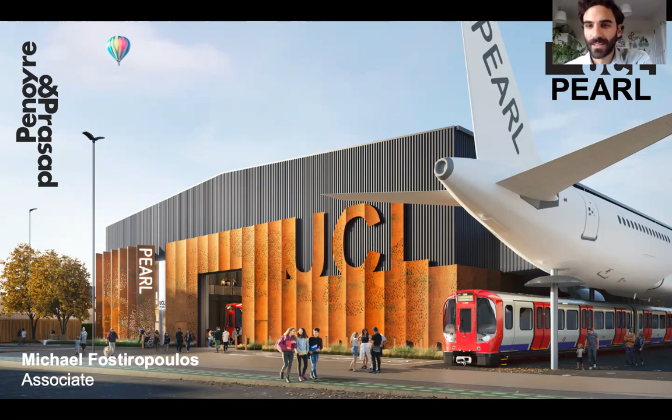Thanks very much. And I'm really excited to talk to you all about this project. It's definitely been a unique one. I'm not sure we'll ever get to design another building with a decommissioned aeroplane hanging off the side of it. So there's a lot to get through in 8 or 9 minutes, so I'll try to whiz through as quickly as I possibly can. So we'll go to the next slide, please.

So the brief we were presented with by Professor Nick Tyler, who's the mastermind behind the project at UCL, was that he needed a building to house the world. So quite a thrilling challenge for us as architects, as you can imagine. Professor Nick and his team, if we go to the next slide, are currently based at Pamela in North London, where they research pretty much any way you can imagine that people might interact with the built environment.

From prototyping new tube carriage designs for TfL, how a large crowd of people might escape from an emergency situation or terror threat, right down to the scale of the neurons in our brains, how somebody suffering from dementia might navigate a complex series of corridors, or how different lighting and smells might impact on the day-to-day life of somebody with autism, say. What lies behind all of this is really the pursuit of understanding how people perceive and interact with their environments, in order that we ultimately as designers might be able to create healthier and better places to live.

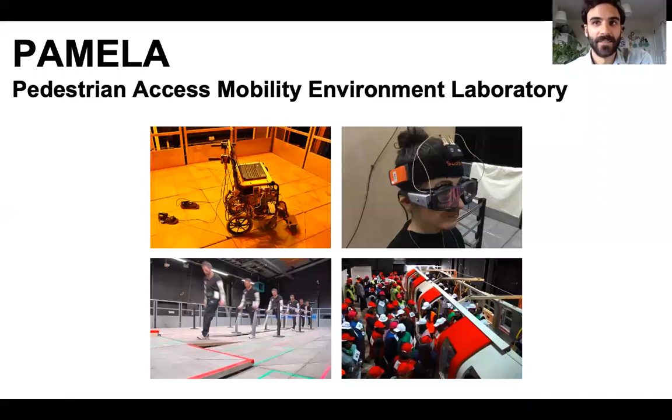So Pearl is a supersized version of the previous facility. It's multi-scalar, it's hyper-flexible, it's transdisciplinary, it's permeable, and it's community-focused. And as UCL's Dean of Engineering puts it, it's a once in a generation opportunity for UCL to lead on a global stage.

So to give a bit of wider context, Pearl is part of an innovative approach to national infrastructure research known as UKCRIC, which is really the driver for around £600 billion worth of investment in our national infrastructure over the next 50 years. UKCRIC is a collaborative network of labs across 15 universities, although Pearl is the only one really that actually puts people at the centre of its approach. The whole idea at Pearl is to look at research in a completely different way.

And in 1934, the May and Baker pharmaceutical site was established up the road from the Ford factory. During the post-war recovery period, May and Baker played a really important role in meeting the enormous demand for medicines around the world. And so maybe we can draw some sort of a parallel here with the work, say, AstraZeneca are doing now with Oxford on the COVID vaccine.

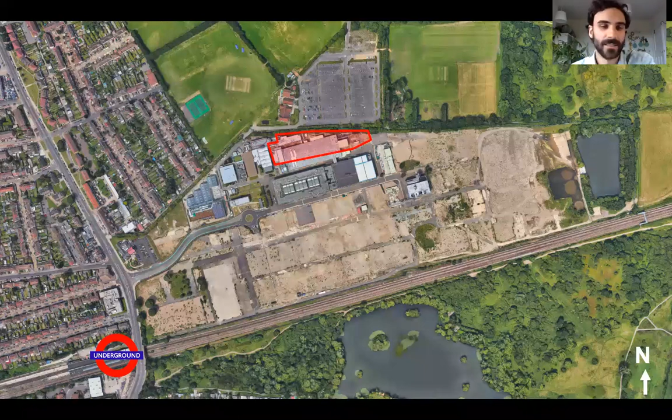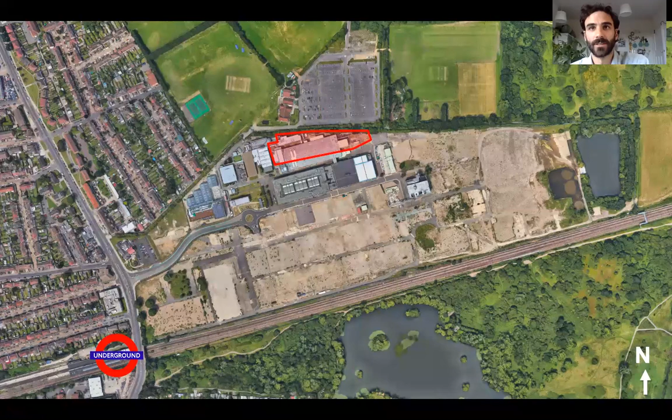Fast forward to 2020 and May and Baker are long gone, and what's left is a vast industrial wasteland. The London Borough of Barking and Dagenham are obviously desperate to turn this site into a force for good, so they were thrilled when the opportunity arose for UCL to purchase this piece of land here. And this is the council's vision for the future. And with UCL here in the form of Pearl, this coming together of science, technology, research, and the creative industries will be huge for the borough.

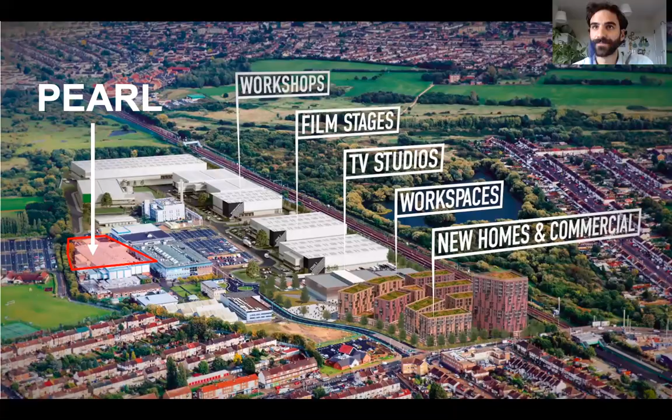So here's Pearl's piece of land there. The buildings on it that you can see there were the most recent additions to the pharmaceutical plant, but for the past few years have actually only been used for filming Avengers movies, believe it or not.

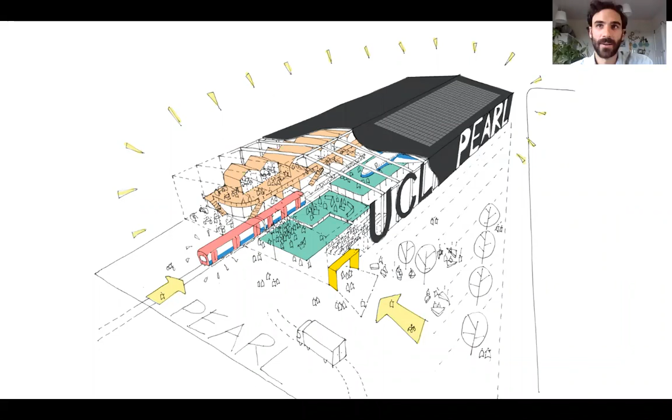And the next slide shows just an early sketch that we did right at the beginning, really, to think about how Pearl might come together on this site. And basically, it's a big box of tricks. The Groove, aptly named by Professor Nick, who's a jazz musician when he's not rethinking the whole world, is a two-story building within a building, and it's the brain box of the laboratory, as well as the public entrance and the interface with the community.

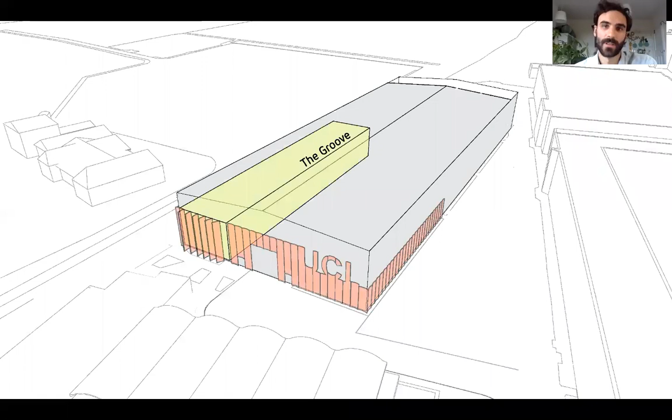And to let everyone know that UCL's landed in Dagenham, we've dressed the front of the building, and plant is plugged in at the far end of the building to really simplify the services strategy. And the rest of the space is the lab itself, with a zone of large flexible storage to one side.

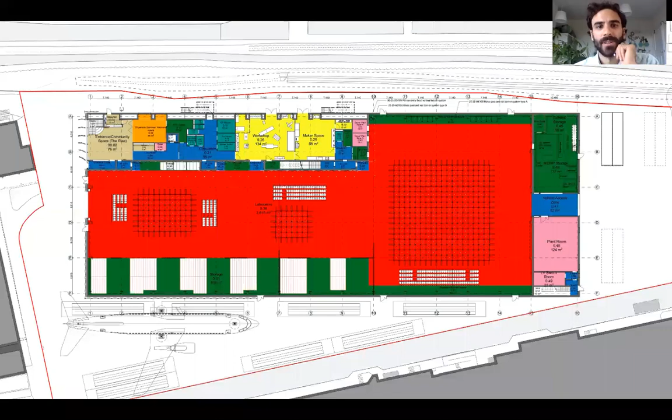So the next slide shows a floor plan, and here you can see how those elements are distributed across the space, with the main entrance in the top left corner and the 100-meter long lab shown in red. And the square grids you can see in the lab are reconfigurable hydraulic flooring units that can be infinitely rearranged, not just shown in these three grids there, and controlled via an iPad.

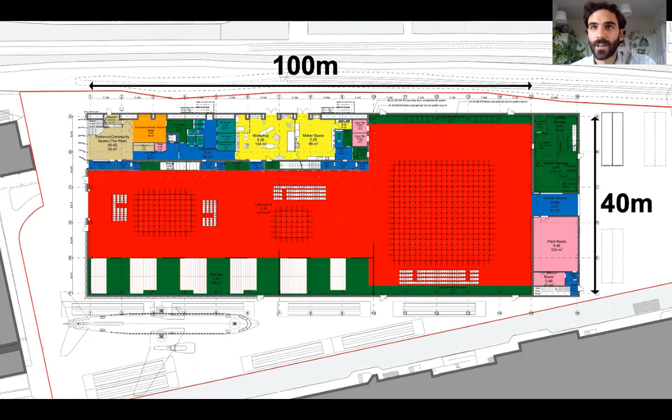And on the next slide, we come inside the lab space, and you can see some of those flooring units being used to create various experiments and mobile seating for up to 600 members of the public. And there's a huge smart lighting and speaker array above that can help recreate almost any internal or external condition you can imagine. In many ways, this is a lot like a giant black box theatre, except here you're trying to convince the active participants of the experiments, rather than the watching audience as you would in a theatre, that what they are touching or standing on is real.

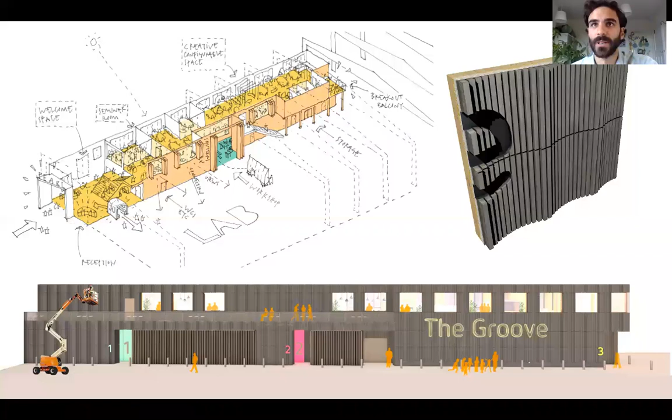So yeah, and there at the back right of the space, you can see the Groove, which if we go to the next slide, you can see is clad in black timber to ensure it doesn't disturb the experiments too much. And underneath that black timber cladding is a factory-made cross-laminated timber box that's completely structurally independent from the main steel frame, so it could be rapidly assembled on site in just a few days.

So here, these overviews inside the Groove, the two-story building, show super flexible workspace for the researchers that will be reconfigured on a kind of weekly basis, really, to meet the needs of the research projects. And they're overlooking the lab space below. And you can also see on the ground floor workshops for constructing sets and prototypes for experiments, and seminar rooms and community space and entrance on the left.

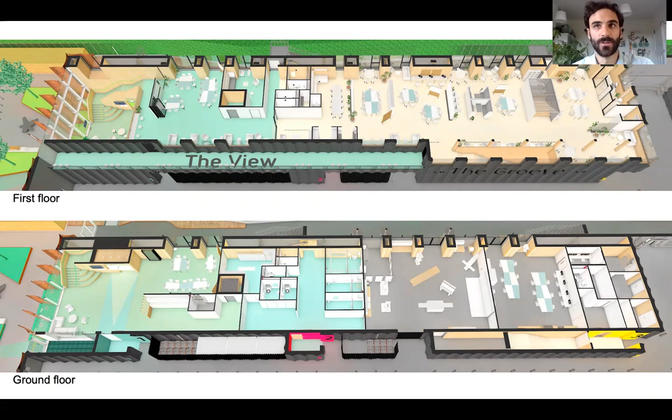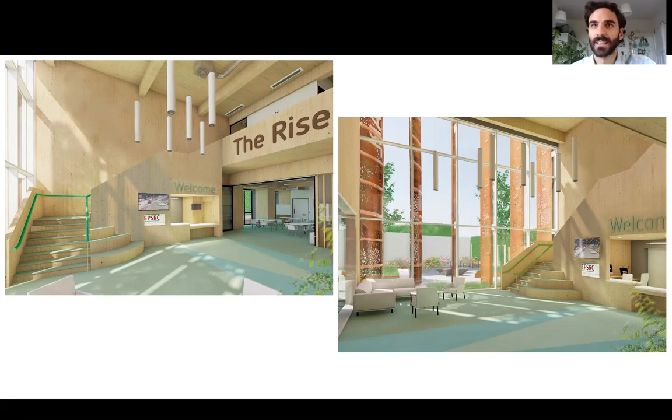And this is a couple of views of that community arrival space, where locals will be encouraged actively to drop in and have a chat with the team at Pearl, maybe about that dodgy crossing on the high street that just doesn't work for their wheelchair.

And on the roof, by taking up every single square inch of space with PV panels, as well as optimizing the building envelope and structure, we've managed to achieve UCL's first ever net zero carbon building, demonstrating the university's real commitment to addressing the climate emergency and leadership in the higher education sector.

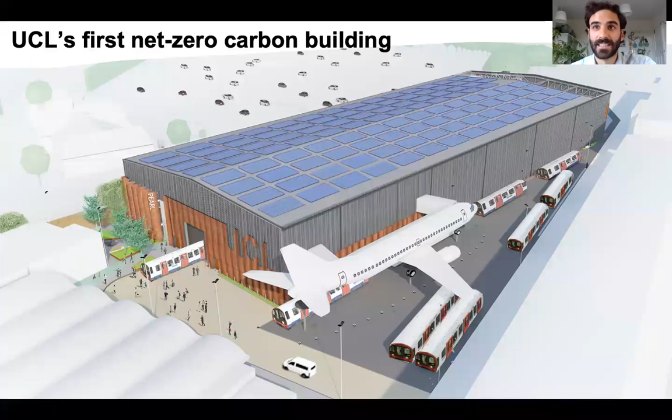So when designing Pearl's main entrance and architectural facade, we wanted to reference the wavy roof as a nod to the site's heritage. So hence the gentle scalloping of these 9-meter high industrial weathered steel panels that peel away from the glazed main entrance area to provide solar shading and signal arrival.

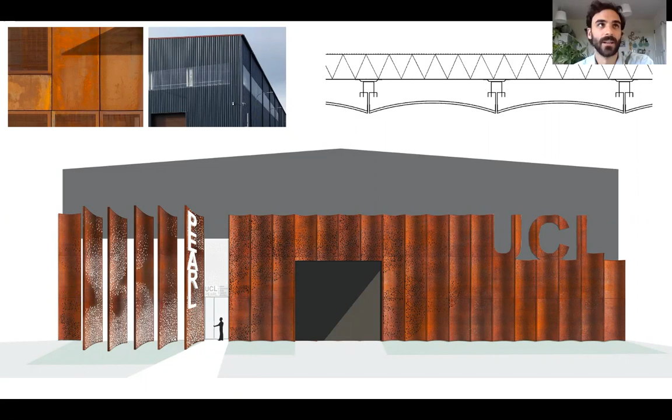And we perforated these panels to get light into the entrance space and to bring a sense of movement to the facade. And through lots of testing with Professor Nick and his team, we moved away from any regular patterns like some of the ones at the top there, which could be a cause of distressing visual noise for people with sensory or neurological difficulties.

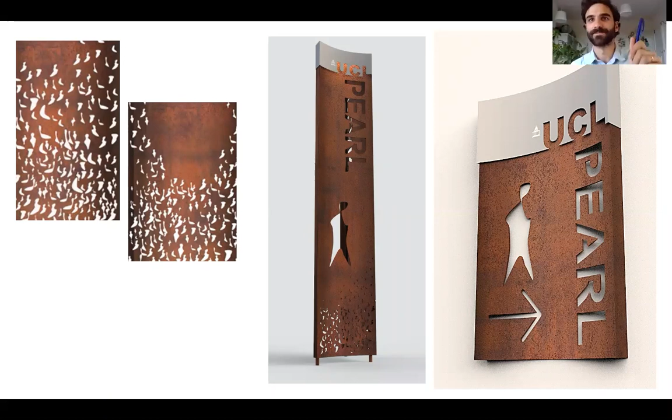So we instead looked at natural imagery, bird murmurations and people flow and crowd movement, which the last two there are big parts of the work that goes on at Pearl. And so zooming in, these perforations are made up of sort of anthropomorphic blobs to represent people, which are then carried through onto the signage across the site and the building. And the overall effect layers materiality and graphics and building identity that begin to tell Pearl's story.

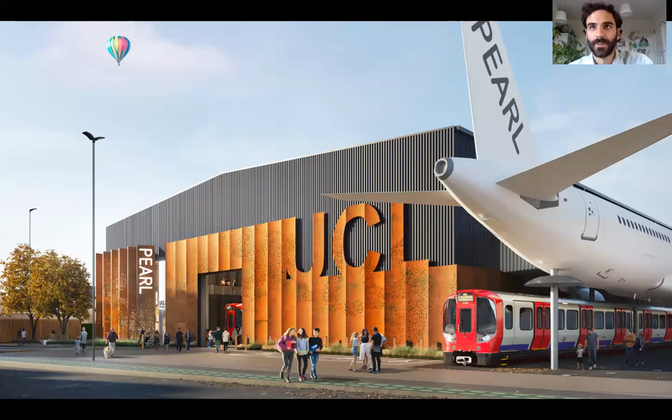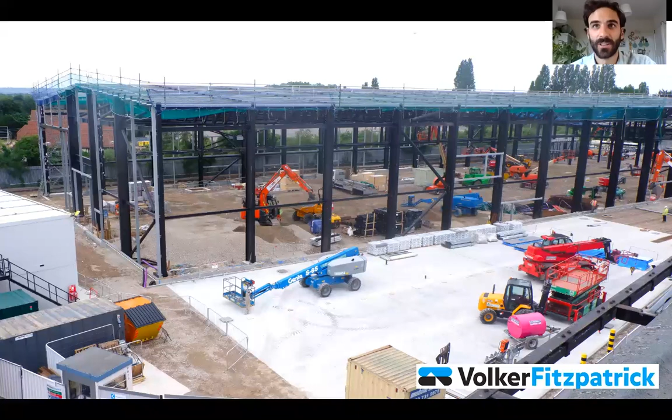And the building is a giant, finely tuned piece of research equipment, both inside and out, and is there really to serve and collaborate with its community from the local right up to the international. And yes, at some point, 2 Chinook helicopters are going to lower that plane into place. And touch wood, so far with no disruption on site during lockdown, we're on track to complete in spring 21.

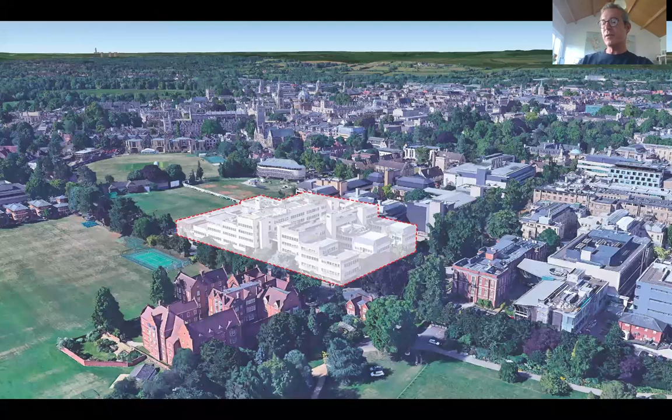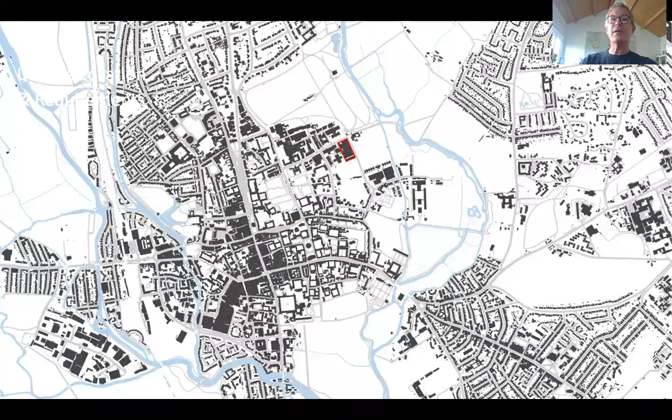So this building is now currently being demolished, but a plan is being developed and has been for some time in how to replace the departments who were occupying it. Next slide. And just in terms of location, for those of you who know Oxford, sorry if we just go back one, the building itself sits at the northeast side of the city and is a bookend really to the science quarter, which is also now falling into a conservation area. And the scale of this building as it stands currently, the Leslie Martin building, is one of the bigger university buildings within the Oxford campus.

So what is the building about? It's about bringing together 3 departments, experimental psychology, zoology and plant sciences, and bringing those 3 together into a new, really quite transformational experience for research, teaching and learning. And of the 3, the 2 departments with closest synergies really are zoology and plant sciences. And in the new facility, once it's ready, they will merge into one department to be known as biology. But in addition to that, the building is also about giving back to the public and engaging in a wider way, and we'll see how that happens a bit further down the line.

We've had to do a lot of engagement with the university. Obviously, bringing 3 big departments together involves a huge number of stakeholders, and our team have been managing that with the university over the last year and a half, and it's involved a significant input just to help develop the brief, refine the approach, and really understand some of the requirements of those departments, and importantly, how they will interact in the new facility itself. And then the wider issues around how the estate itself wants to run the facility, how that engages with the community, and the number of the logistical issues in really bringing a new building of this scale on stream.

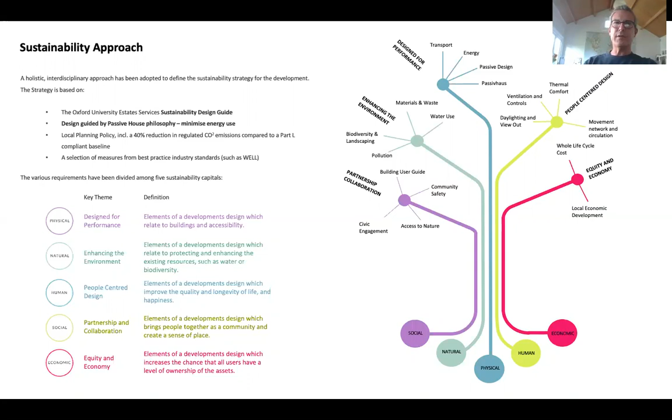And in addition to that, we've agreed an approach with the university to also look at a 40% carbon reduction over the Part L compliant baseline. But more than that, we were interested in trying to see how that sustainability approach really tapped into other features, especially the human and social aspects of sustainability, and how that can be driven into the building itself.

Next. A very quick look at the site itself. As I said, the current building occupies a corner site, which has a blind corner to it. And I think what we found was that there were a number of challenges around circulation, access, logistics, neighbours, views, and so forth. And we tried to digest that and then reinterpret it into a new facility.

And one of the important things that we've had to deal with is the retention of a very new building that was bolted onto the back of the old Tinbergen building that you can see at the bottom end of the site. It's called the Chemistry Teaching Laboratory, which is only a 2-year-old new facility. And that has had to be retained and will be adapted, modified, and kept in full operation throughout this new development.

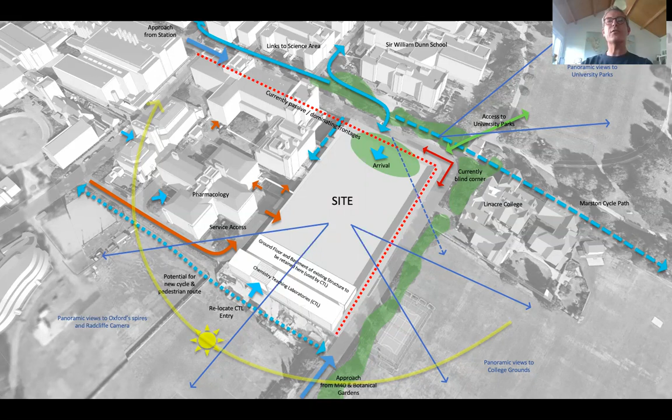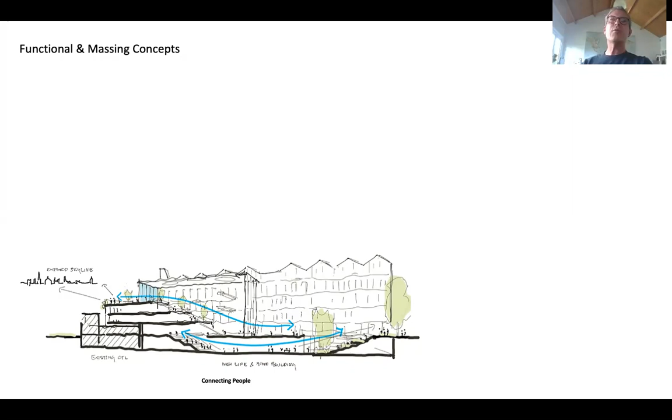So what are we doing in terms of a design response? We're connecting people. It's about bringing a new facility together. It involves postgraduate research, scientists, academics, as well as students. It's also about engaging the wider community. And one of the ideas was to give back some of the space on this site, whilst addressing some of the issues around public realm and accessibility.

It also needs to be a very adaptable building. Much of the research that goes on is grant funded, and those groups ebb and flow with the grants. So we've needed to really focus hard on how wet labs could become offices, and how we contain the right level of write-up space to service some of those laboratories. And furthermore, how in the long term, because this is a building for 50 years, how the science may change and adapt, and how that's tackled and accommodated within the structure itself.

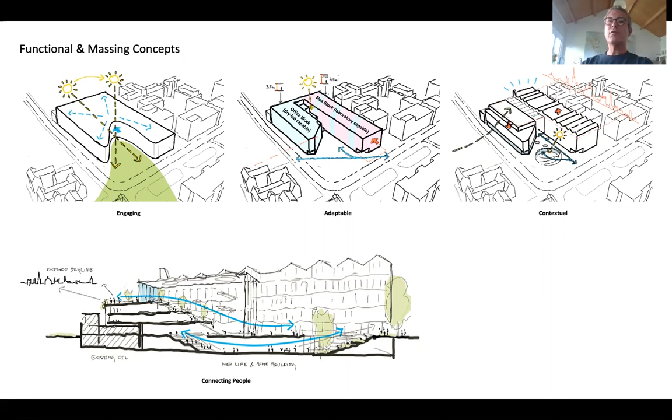And then contextually, this is a big new building in Oxford, and as you can imagine, especially within the conservation area, there are a huge number of contextual issues, certainly around massing, scale, skyline, impact on Oxford itself, long distance views. And then importantly, from a well-being perspective, how the building is connected to nature, given that it's on the edge of some playing fields and parkland, and how that is brought into the building to really help the well-being of its occupants in the long term.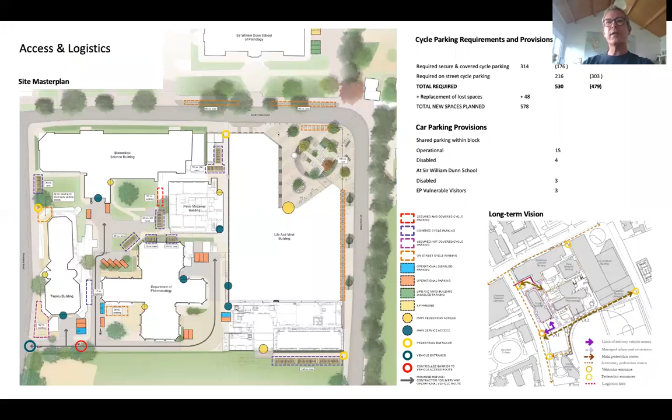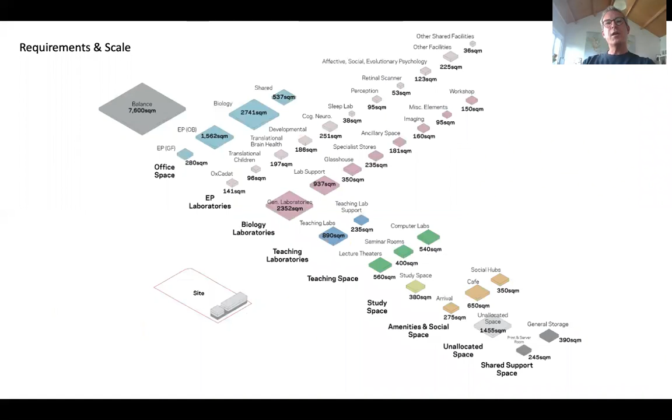Quickly, in terms of scale, this is a 25,000 square metre building, bigger than the existing Tinbergen building, but on a smaller footprint because of the way we've given some of that space back to the public realm. Principal contents are traditional teaching and lecture facilities. There are also a number of laboratories, both category 2 wet labs and dry labs for the experimental psychology department. And on the top of what we're calling the flex block, where the laboratories are embedded, there are also a number of glass houses and growth chambers.

So a very complex mix, and how do we bring that into a new building? We've taken the idea of having 2 principal blocks, the flex block containing laboratories, and the office block, which contains most of the write-up space. And these are brought together through a common atrium space.

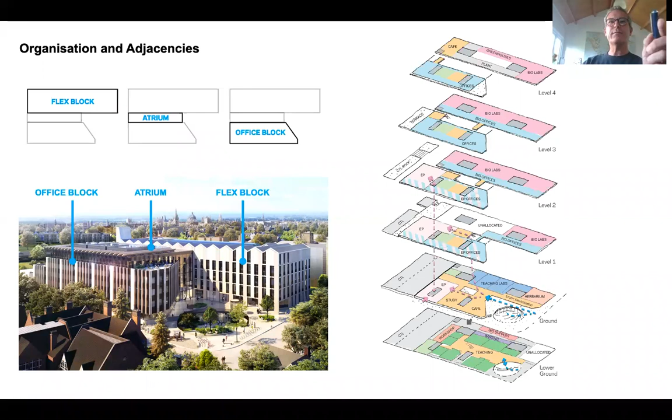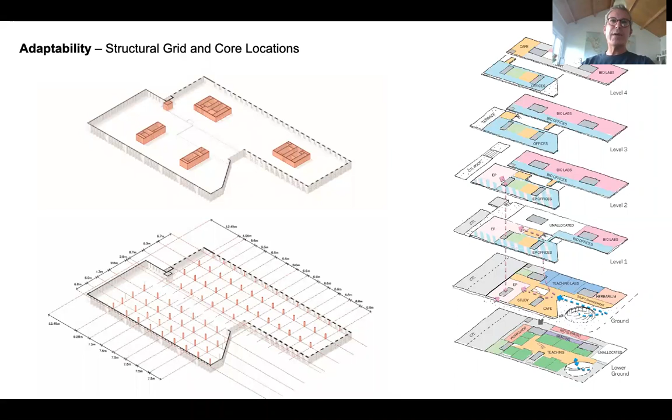One of the things that we've had to consider also is the long-term adaptability of the building, but also the buildability, trying to ensure that we can get this development up and running as soon as possible, given that two of the departments are currently in temporary accommodation. So looking at structural grids, planning grids, service risers and cores, and also vibrational analysis so that we can anticipate or best adapt the building in the long term to future needs of the science.

Coming back to that idea of a shared ecosystem and drawing upon the themes of the building in terms of its research, we've tried to embed some of those ideas in some of the common spaces within the facility, primarily from entrance point through up the building in the atrium and in the general meeting areas along the way, to give a shared experience, an opportunity to both meet, relax, work and engage, and really bring those three departments together in a facility that they haven't really experienced before.

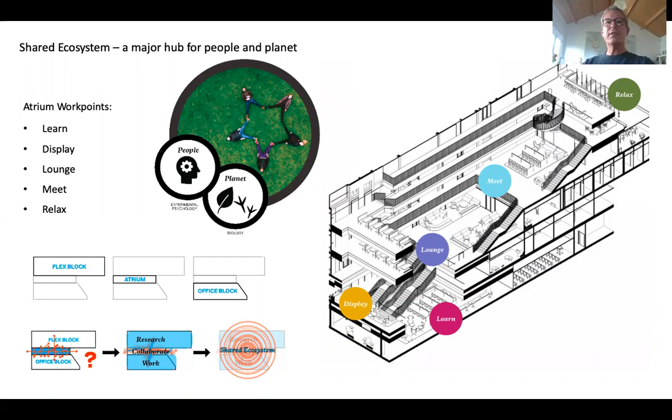So this is how it's shaping up. This is just giving a long section with elevation view into the building, and really also trying to explain how the majority of the teaching space, which is postgraduate students coming into the building, are occupying the lower levels of the facility. So we've developed an approach to bringing students in at lower ground from a common entrance externally, as well as then connecting them through to the rest of the building with atrium space, daylight flooding down the building, and also really trying to ensure that there is a rich feel to the lower areas of the building in terms of light and activity.

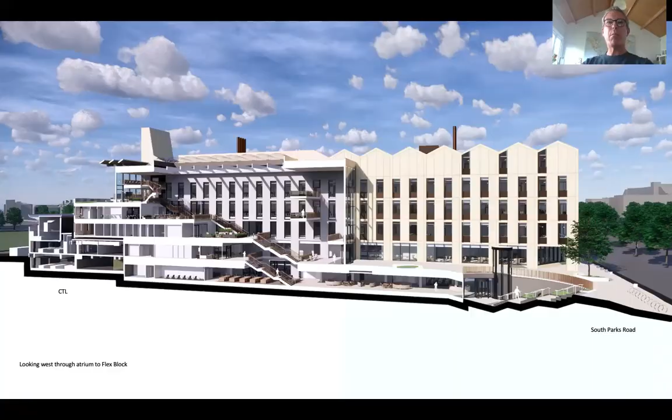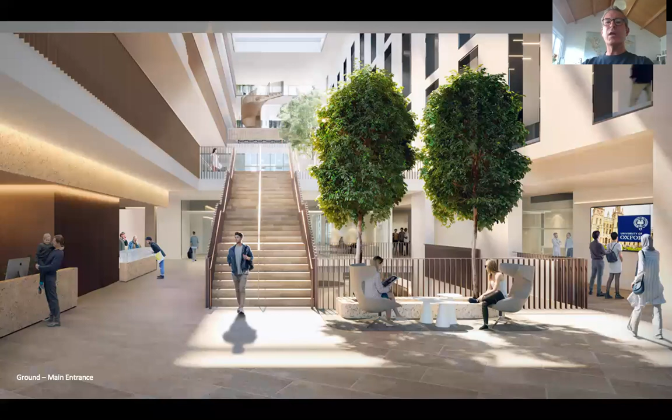Kind of just a working section at the moment across the building. This is a densely populated building as well, a maximum capacity of 2,000 people in here. So how do you deal with that in terms of daylight, well-being and so on? And one of the key themes here is that we ensure that the building is never one floor away from green space, whether you're at ground, lower ground or at the top floor. And these next images will just give you a feel for the quality of environment that we're trying to build into the facility as you experience the building from either a student or an academic's perspective.

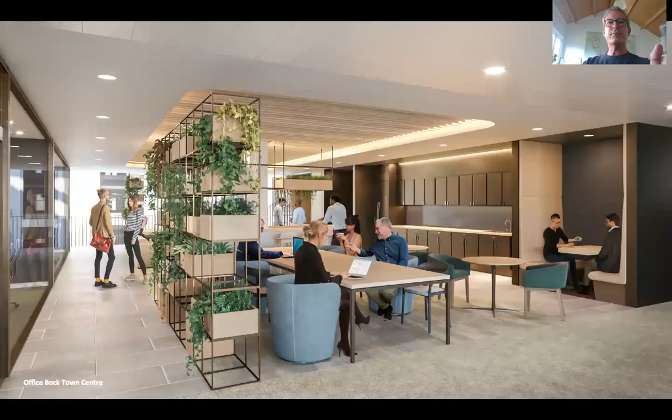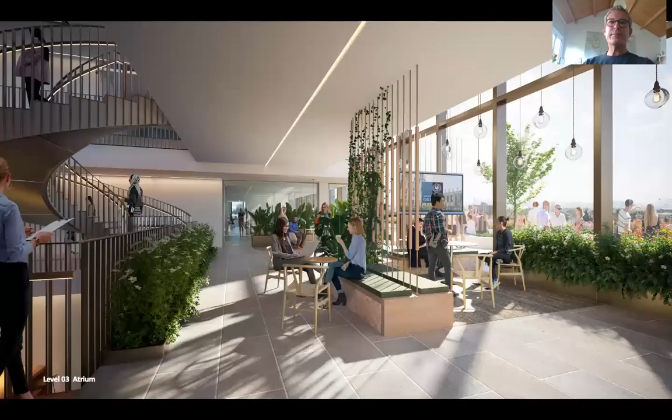Here, upper levels in the office block, it's important to be able to break out from conventional office space. We're developing spaces similar to this, which we've called a town centre, where people can congregate, gather, meet informally and work at the same time. And as we progress up the building, next slide, there are opportunities that we've incorporated to build in terraces along the way.

Sorry, just one back. And what we've tried to experience with the best use of the facility is making use of the fantastic views as you gain almost a unique perspective from the upper levels of the building, looking back to the city centre of Oxford and its beautiful skyline. Here there's an opportunity for cafe and functional space, and a really great place to celebrate the occupants' activities, whether it's for students, researchers, or indeed third parties. Next slide.

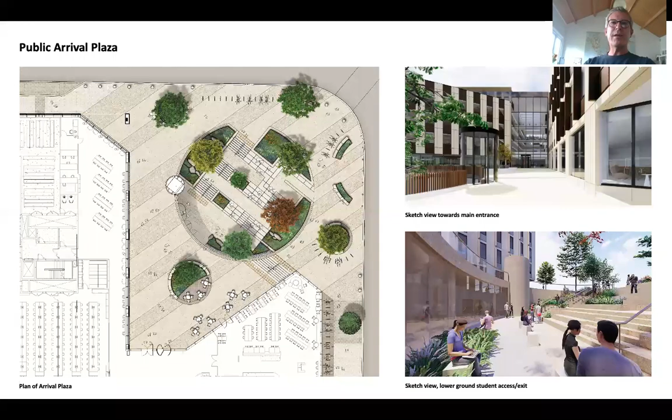Very quickly, coming back to the outside and how one approaches the building, I mentioned this external space. We're calling it a public plaza, and it's a clever device both to activate this corner of the site, to engage the public in good weather, but also draw people into the building, creating a really live and activated public area immediately outside the building itself. This also links the ground to lower ground entrance.

And one of the issues we've been challenged with is a VAT strategy around the building's funding. Given that teaching attracts VAT and research does not, we've grouped teaching, as I said, to the lower levels of the building. And that has really helped bring us a rigorous approach to where we put lecture spaces, seminar spaces and so forth, and really make best use of the budget we've got without incurring VAT penalties.

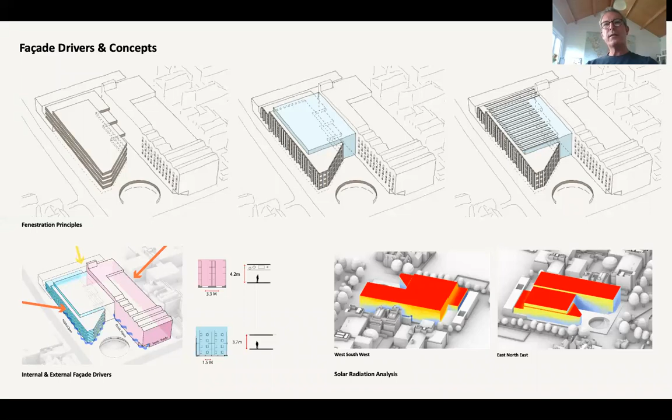Next slide. Very quickly, facade drivers, an external building envelope. Given its orientation and functionality, we've been doing lots of studies, including some computational analysis around how the facade is working. We've deployed a blue roof and also a huge amount of photovoltaics across the top of the office block. And next slide. And we're also looking at materiality as well. Much as the last speaker, we're talking to the Oxford City planners a lot about the contextuality and materiality of the building. How is that reflected in terms of a balanced budget and what we do with off-site fabrication?

In this case, we're currently looking at reconstituted stone panels and a layering system to also develop a very super insulated building envelope that achieves the passive house principles and guidelines that we've been tasked with tackling.

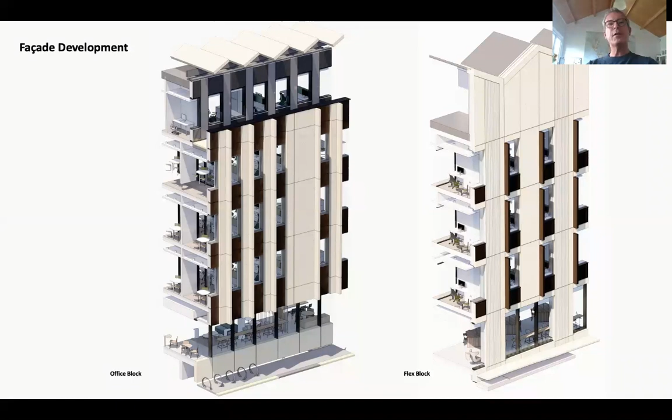Next slide. And similarly, one of the issues that we're trying to embed into the detailing of the facade is perhaps reflecting some of the studies that go on within the research. So we've looked also at some of the patterns and signals that come out of the science from the studies of animals, birds, plants, and humans, and whether that can be subtly reflected into the building facade itself. Next.

And just a couple of images to end on. This just gives you an overview of how the building is panning out. The design is well underway, and in a short while we'll be looking to make a full planning application. There's a lot more I could tell you about. We're very excited about this project. It will be the biggest academic building the university has commissioned in its history.

It has a prominent site and we have the privilege of really making something special on this site for the next 50 years. So we're delighted to be involved and look forward to updating you perhaps in a year's time or so as it progresses. Thank you.

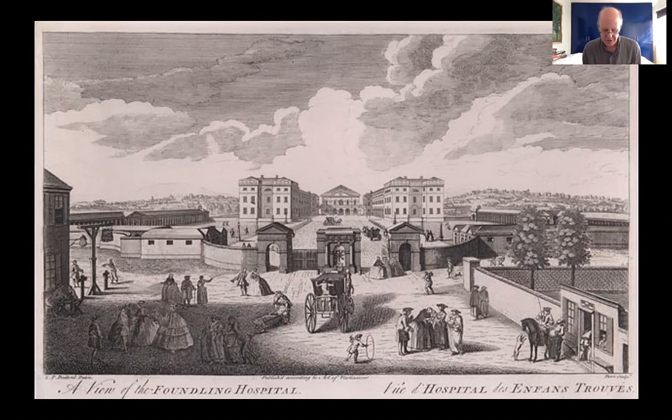Our actual site location is the wall on the bottom right of this image. And what we saw in this was an opportunity really to re-engage care and science with the public realm and the urban context, to celebrate the often invisible work of clinicians and scientists and re-engage that with urban culture. So, next slide.

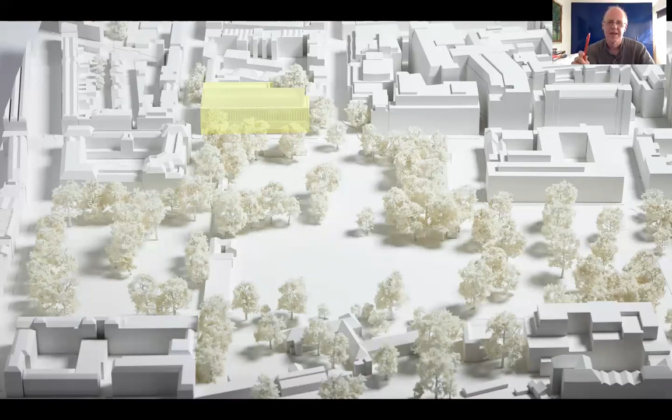This is Coram's Fields today. Our building is picked out in yellow. And it's got a very prominent, almost civic facade with views northwards over Coram's Fields. And then to the south, it steps down towards the more domestic scale of the Bloomsbury Conservation Area. Quite a challenging environment to create a major new building.

There's a double height laboratory at lower ground level, which engages with the street. Ground floor and first floor are largely outpatients facilities. Then above that, we have the research workspace, and at the top of the building, a GMP facility, which is Europe's largest clean room facility of its type, developing treatments at the genetic scale.

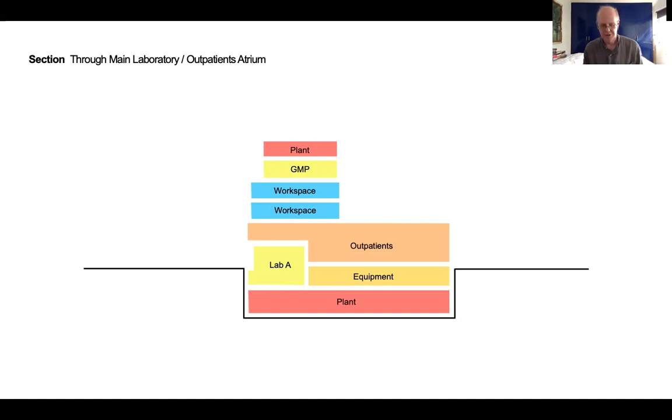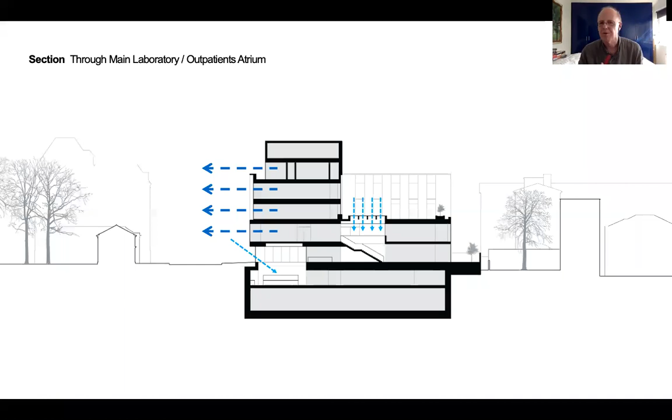So the experience of the building is very much around the interaction of these different activities, and also about the interaction with the external environment. That's views out and daylight in, which is fundamental for the well-being of staff and patients, but in particular the connection to public realm and that idea of being aware in the street of the activity and purpose of the building. So a central concept really is the visibility of activities from the street, which you see in this early section, looking down from the street into the double height laboratory and across to the outpatients department.

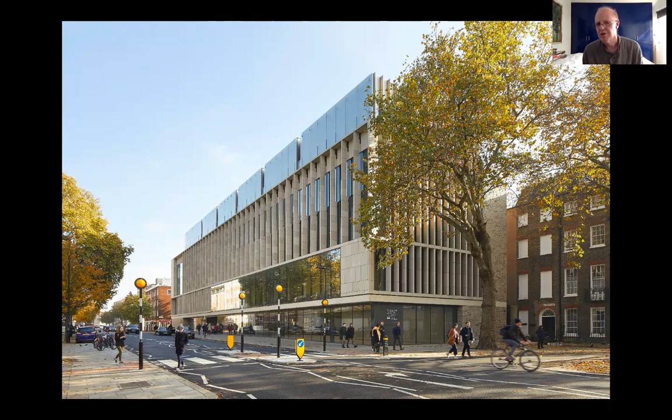So this is the facade that faces Coram's Fields. It's got a series of terracotta fins that give it this almost civic quality. But what they do is they screen certain activities, and then they allow engagement between other activities and the spaces outside, not only into the laboratory and outpatients entrance areas at ground floor, but also the large first floor waiting space for outpatients.

So you look in from the street directly into the laboratory, sometimes right the way through the building. And there's a remarkable sense of transparency. I think because it's north facing without the solar coatings you often get on the glass, you get these kind of views across the laboratory to the outpatients areas beyond.

And the facade itself, although it looks opaque, it looks quite solid, which makes it sit within the conservation area context of brick buildings. It's actually very glazed, almost like a loggia, and the building's experienced as a series of spatial layers moving backwards from the street.

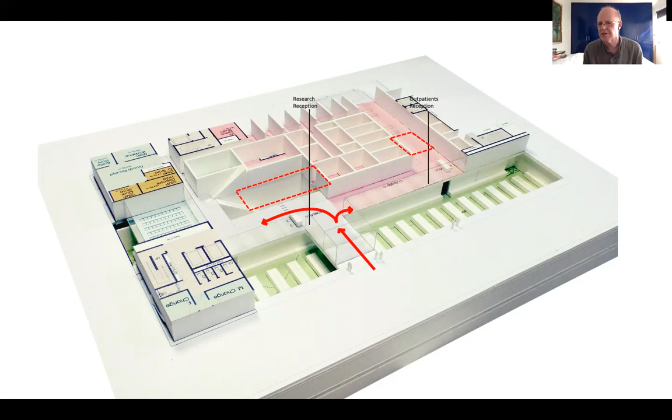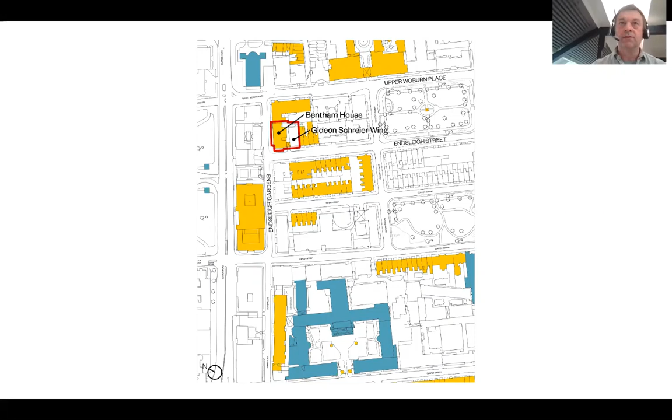Next slide, please. This is how we found it. This was the arrangement of the faculty between the two buildings. So on this stacked drawing on the left-hand side of the screen is Bentham House. Bentham House was in fact designed pre-war but built in the 50s as a trade union building.

UCL bought it in the 60s, and then, as I say, they bought Hillel House, which they renamed the Gideon Schreier wing on the right-hand side, and you can see just the one link at first floor going across there, and you can see the state of the teaching facilities as we found it that very much needed updating, and the issues relating to poor wayfinding and circulation.

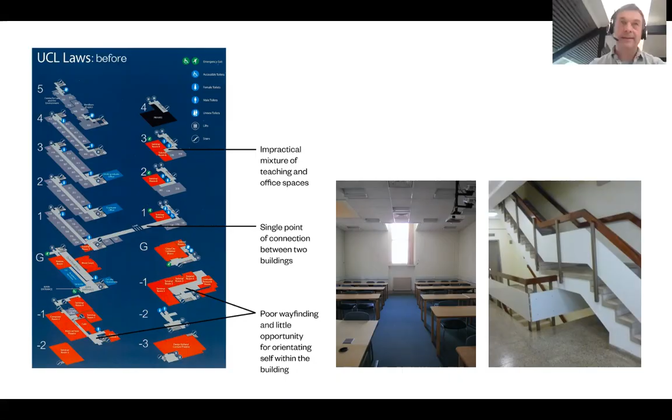Next slide, please. And this is the first floor plan. On the left side, the existing arrangement, you can see the single link through a very narrow corridor between the two buildings. So they operated more or less independently. And on the right, the moves we made, which I'll talk you through, to open up and improve that arrangement with a new extension on the back of the Hillel House building to the top of this drawing.

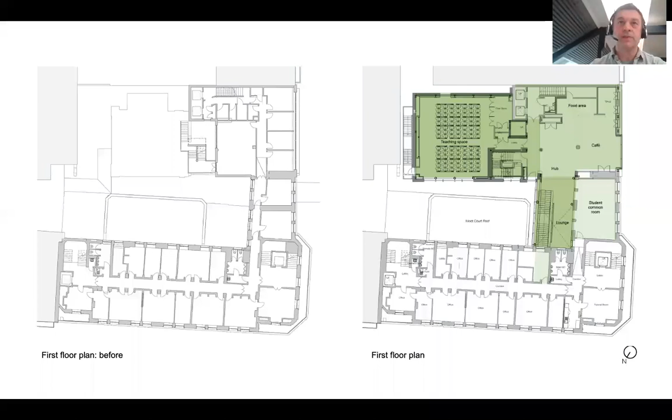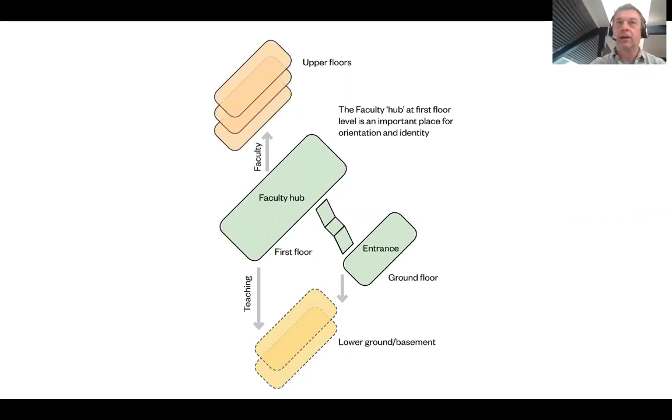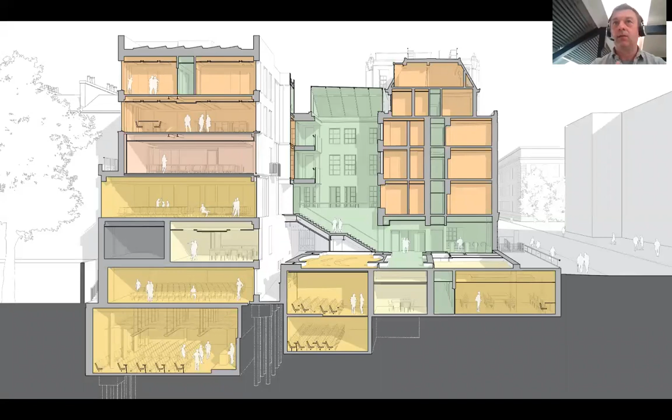The bottom two levels on the left-hand side were existing, and we extended up and out across there to provide more teaching facilities. And in the green in the middle of the plan is our intervention to link the two buildings through an atrium space, exposing what was the rear envelope of the original building as well.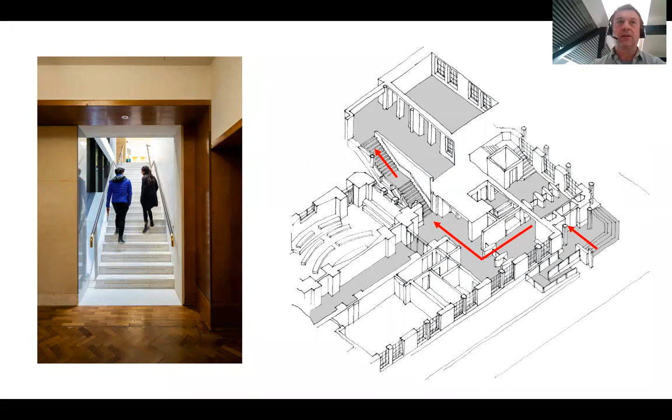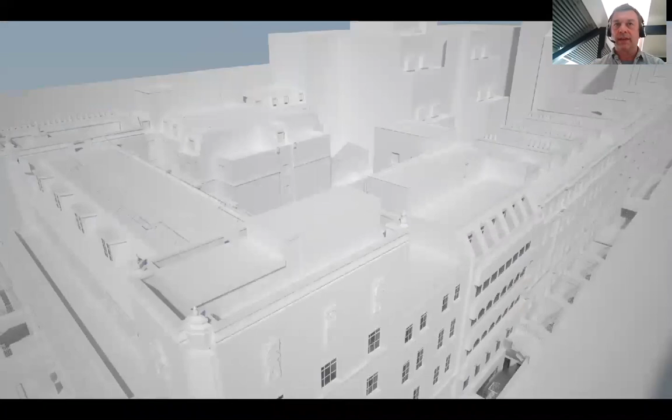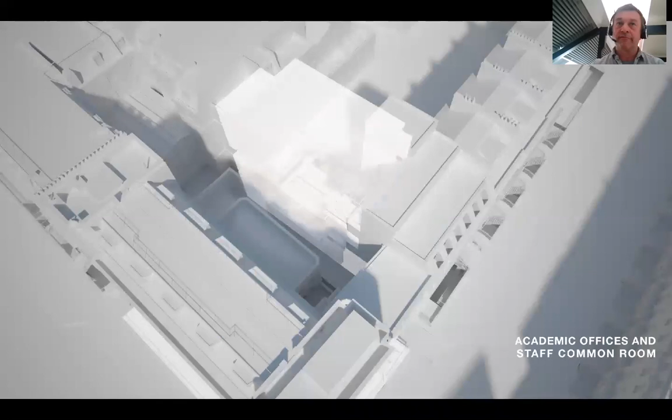Okay, next slide, please. I've got a bit of an animation going on here. I hope it works. I thought it was worth putting in because it really explains how the organization of the building works. And really, we were working to get people into the middle of the building as soon as we possibly can. So on the rear of the building here, we stacked the new teaching spaces, research and study space. You'll see these being added on, and a social hub at what was the first floor level, with some seminar space on the next level up, but very much attached, and then the academic offices above.

And actually these are the green roof technology to achieve BREEAM, and then the new hub space in the middle and a new facade on Endsleigh Street. So this is taking you through the entry sequence. There's an awful lot of flexible space, undedicated space, and the success of the building is very much about how much informal working goes on. I'll go into that in a little bit more detail.

This is one of the principal new teaching spaces, which is actually used for a variety of different uses. All the seats move away. They can use it for conferencing and so forth. This is touchdown space, which works, as I said, in a very fluid way off the atrium, the stair at the back, and then a variety of the converted space within Bentham House, and on the rear of the building, a similar architectural language that draws the materiality of the two buildings together.

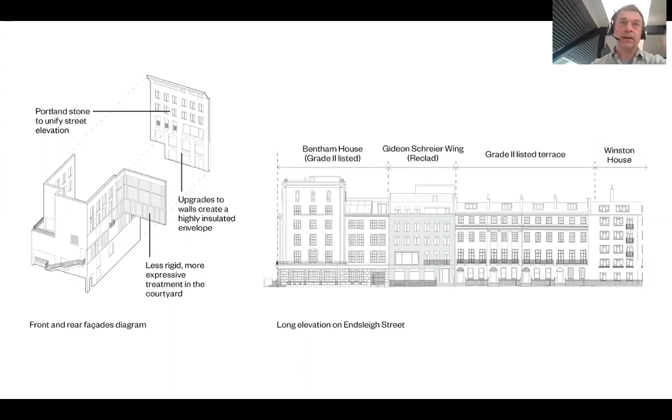Next slide. So we needed to find a way to sort of mediate between the two: the stone on the left and the brick with stone features on the right, and window pattern. So this elevation sort of demonstrates how we did that. We took the fenestration rhythm from the houses, and then used the materiality of Bentham House itself coming the other way. So it formed a single entity to all intents and purposes, and a new identity for laws, and that's the new elevation on the left-hand side slotted in place.

Thanks very much, Matthew. And that is the last of our 4 presentations, 4 very different and very complex projects, but some interesting common themes emerging around flexibility of space and reconfiguration of space, the drive towards net zero and sustainability, and obviously occupiers with some very specific needs. So we have a couple of questions coming in from the floor.